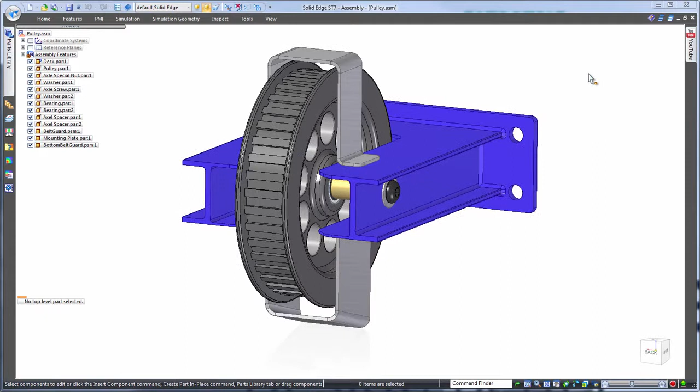First, we'll approach this as you would in most any other CAD system, using history-based editing. Then, we'll take a look at how synchronous technology can help us out. So, history-based first, and let's start with the pulley itself for the initial edit. Notice the list on the left. This is the history-based recipe of features that make up this part.

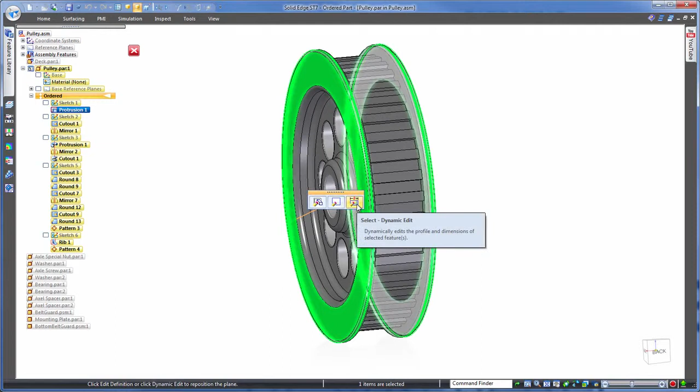It can be tricky finding which feature is the one that we want to edit, however Solid Edge does assist us by picking up the relevant feature after we click on the model in the graphics area. So let's take this 35mm dimension and change that to 55mm. Simple. Oh no, wait. Because this is history-based editing, there are dependent features further down the tree on the left that this has caused issues with, damaging our model.

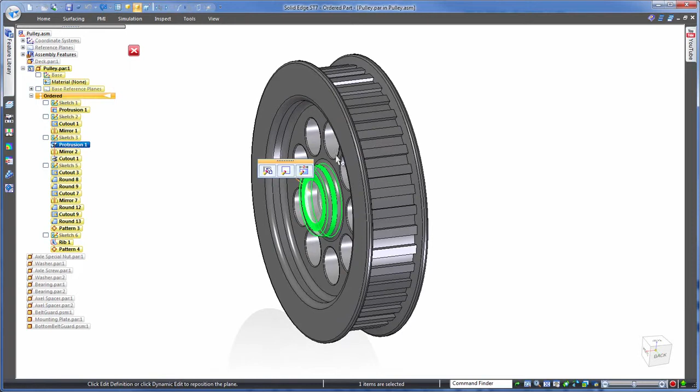So we need to go back and work out how we can make our desired width change another way. It turns out that we need to make multiple edits to not very obvious features in a particular order. Okay, done. So, back at the assembly level, obviously the wheel is now wider, which means it's interfering with the other components. And we have some internal parts to deal with too.

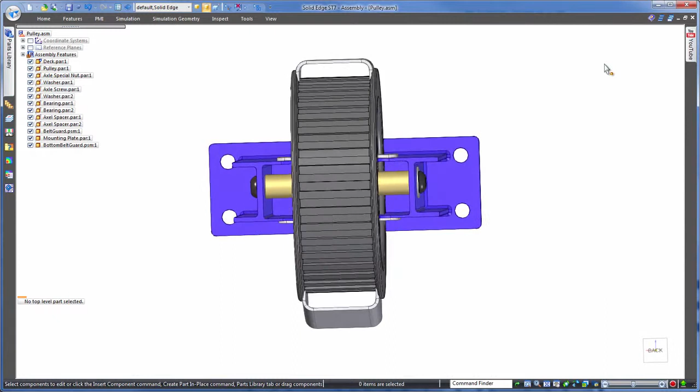Now to modify these, we could continue using a history-based approach, editing each individual part. However, this is time consuming, as you've seen. We could set up links between the parts so that a change in one part updates another. However, this too takes time. We want something instant that doesn't have the overhead of interlinking. So let's turn to synchronous technology.

First, notice we're staying at the assembly level. From here we can simply pick a face and drag to edit. And Solid Edge is intelligent enough to know that this is a symmetrical part, so we probably want to keep it as such. But ideally we want to make several edits at the same time. Let's see how this works by selecting multiple faces from multiple parts.

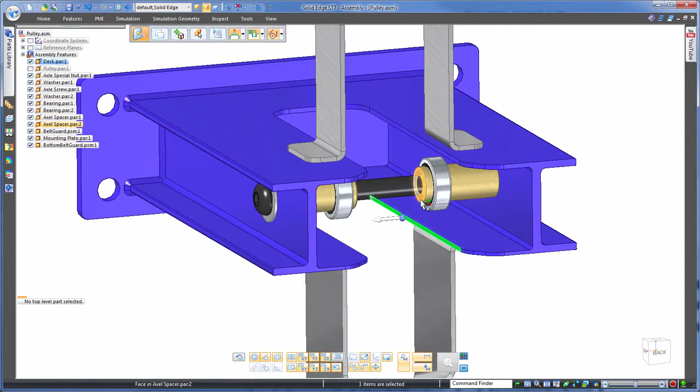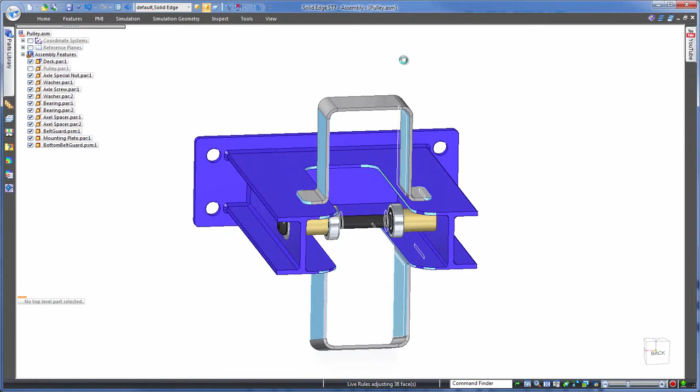Here we can modify not just one, or two, or even three, but let's edit 4, 5, and 6 different aspects from 4 individual parts. And still, Solid Edge is automatically seeing that this design is symmetrical, so actually it's doing double these edits for us. And also notice how everything else is changing sensibly. Tangent relations and wall thicknesses, for example, are all being maintained. That's what we mean by one-shot multi-part editing.

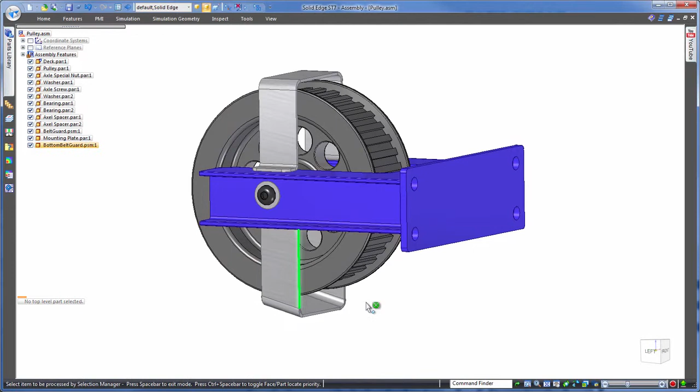Another way to make one-shot multi-part edits is by aligning faces, again all at the assembly level. Let's take the back side of these brackets and align those together. Nice and easy, just click the first face from one part, and the second face from the other part, and done. We could even take this a step further by asking Solid Edge to find all of those coplanar faces that we've just been working with, and then get those snapped to this back face here. Just as easy, done.

So there you have it. No more in and out of each part with multiple time-consuming history-based edits, or even the need to interlink. Synchronous technology in Solid Edge allows one-shot, multi-part editing, all at the assembly level.